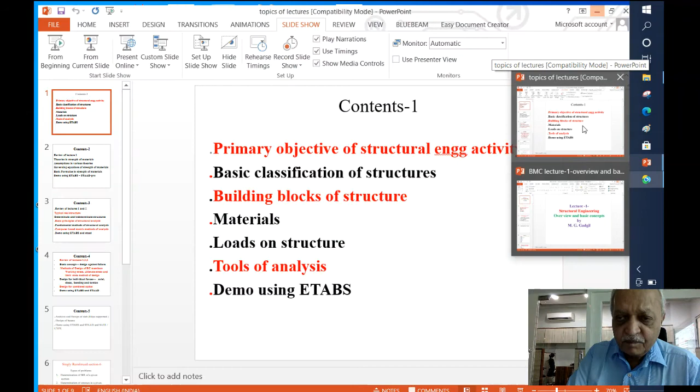And see the types of topics which we shall be considering. We have arranged this entire course in 7 or 8 sessions to start with, where we just want to see which topics we shall be covering in the entire coursework.

The first lecture that we shall be considering today is the primary objective of structural engineering activity, basic classification of structures, building blocks of structures, then the materials that we consider in our field, then the loads that we apply on the structure, the tools of analysis, and some demo if required using the software which is very popular, ETABS, and so on. I think most of you are exposed to the software ETABS or STAAD or something.

Okay, now this is the outline of our lecture today. In the next lecture we shall be reviewing what we studied in the first lecture. Then we shall be considering the theories in strength of materials, how we calculate stresses and so on, the assumptions made in various theories, because you determine forces, then the stresses, and then your design starts. So the governing equations of strength of materials will be studied, basic formulae which we use to convert forces into stresses will be studied, and in some demo using either ETABS or STAAD.

In lecture 3 we shall be considering the real structures which we shall be analyzing, which may be determinate or indeterminate. Then basic principles of structural analysis we shall be seeing. Then the fundamental methods of analysis we shall have a look at that. While computer based matrix methods we shall just see the outline, because we will not be going into the actual working of the method, that's not required. You have got very powerful tools and the softwares.

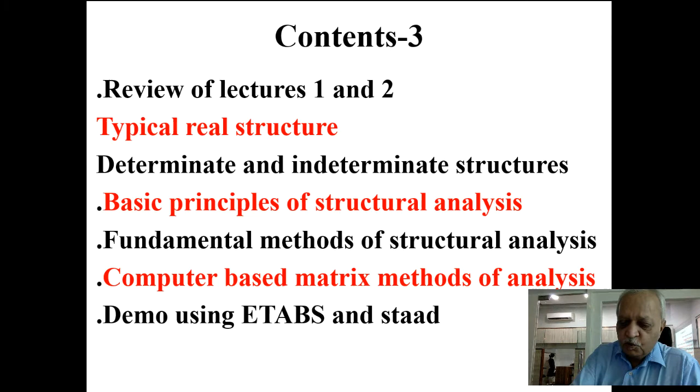In lecture 4 we shall be considering the design part. So far, the first 3 lectures were only analysis based. We shall be considering the design, where we shall consider the theories involved in the design: the working stress method, the ultimate stress, and the limit state method. Then the design for individual forces we shall see, that a member carrying axial force or shear or bending, how they are designed. And then when you have got an actual member with combined forces, we shall be considering those elements design.

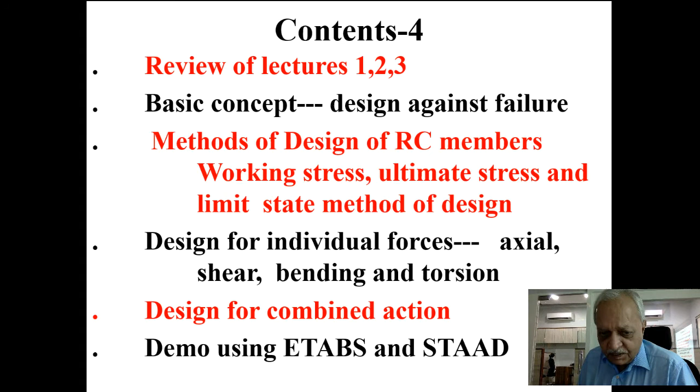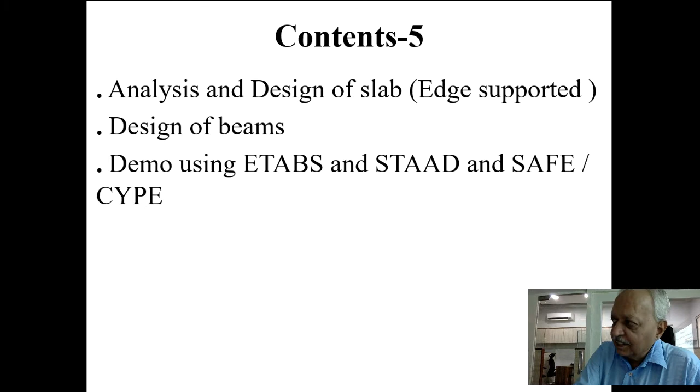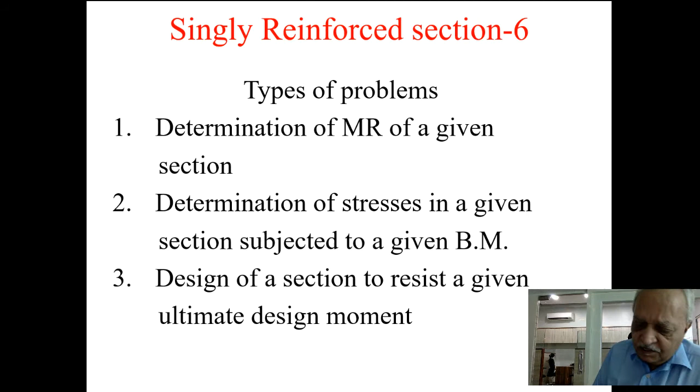Later on in lecture 5 we shall be considering the actual structural element as such, like design of beams or design of slabs, how we do it. Otherwise it is only element design so far, either design a beam or design a slab with given data and so on. Then we shall consider the important aspects of the design process, how to determine the moment of resistance of a given section, determining the stresses in the beams, and design the section to resist the given moment. So we shall see some important aspects of this design process.

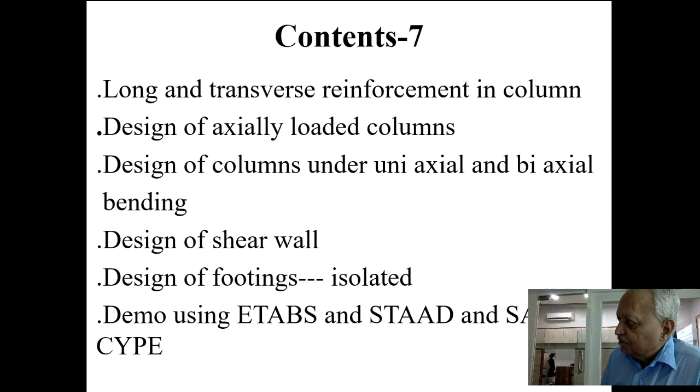Then we shall consider the design of columns as such, the axially loaded columns under axial load and moment, biaxial load, and so on. Then we shall consider the design of shear walls in isolation, then design of footings, isolated footings, and so on. Later on we will consider more complex types of structures like the raft foundation, how to design that, or the pile foundation, design of pile caps, and so on.

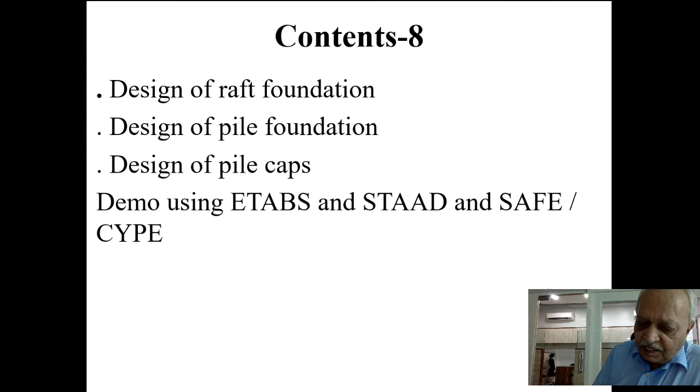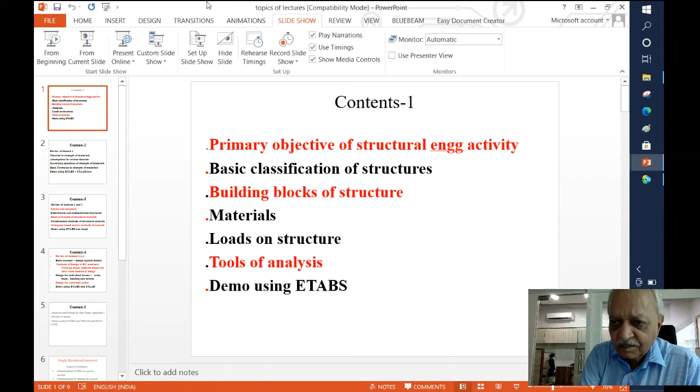Now we shall consider today's presentation, that is structural engineering: an overview and basic concepts. In this particular lecture, the topics which I have planned to cover are as follows. The primary objective of structural engineering, with which we start with this subject, then the basic classifications of structures.

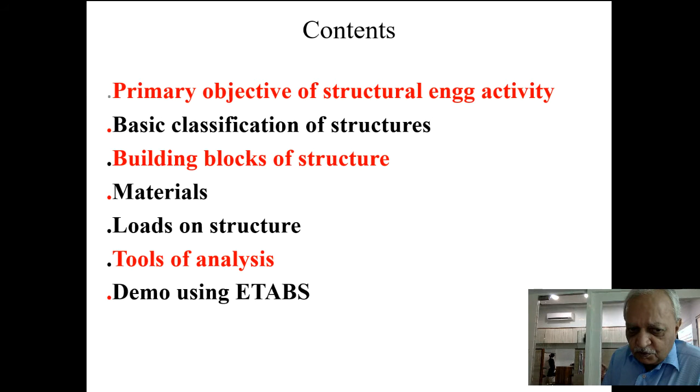Then we have the building blocks of the structure, which finally make a full-fledged structure: different materials which we use, their properties, the important properties used in analysis and design. Then the loads on the structure, different types which we have to consider. Then we shall consider the tools of analysis, and with that we will close the lecture for today.

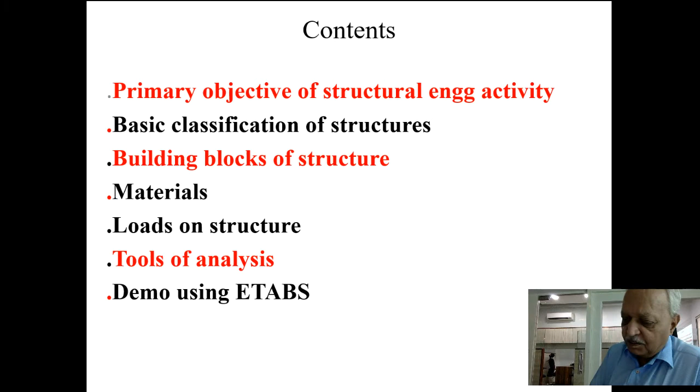Our idea is to get an overview of the field in which we shall be considering the entire presentation. The primary objective in structural engineering is to plan, design and detail a structural system which will carry safely the loads coming on it. So someone says, okay, you design this structure. The planning of the structure is a different aspect, but someone gives us a structural system - this is the building of this height, column locations and all that. Then we say we have to design this structure to carry certain loads, which are specified, and design it so that the load is carried safely. That is what we expect from the design.

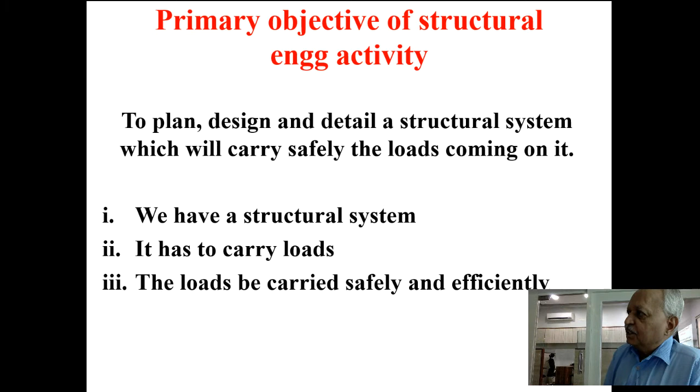So we say that we start with a structural system. Now when you say you have got a structure, we have to see, as an engineer, what you call a structure. If you ask a common man what he understands by a structure, he will look at the building and say, oh, that's a structure.

Or he will look at a bridge and say that is one more type of structure. Or maybe containers, or water tanks - he will say oh, that's also a structure. Sometimes you can see the retaining walls presented near the approaches to bridges, or in hilly areas. Then you have got dams, massive structures which have the purpose of retaining water and so on. So those are huge structures - a common man will understand, oh, that is a kind of structure.

Or an aircraft - it carries huge mass inside it. It has to safely fly, and several forces are applied on it, and there is apparently no support, as we see as a layman, since it's just moving in air. So there is no firm support as we consider for foundation of our buildings. But there are fixed points where the entire load is finally resisted in terms of the air blast that is driving it forward and lifting it up. Those fixed locations are provided in the aircraft at which the whole mass, or the gravity forces, are resisted.

Then we have got the ship, which is floating on water. So they are also massive structures. They are uniformly supported through buoyancy, and someone has to design that as a structural engineer.

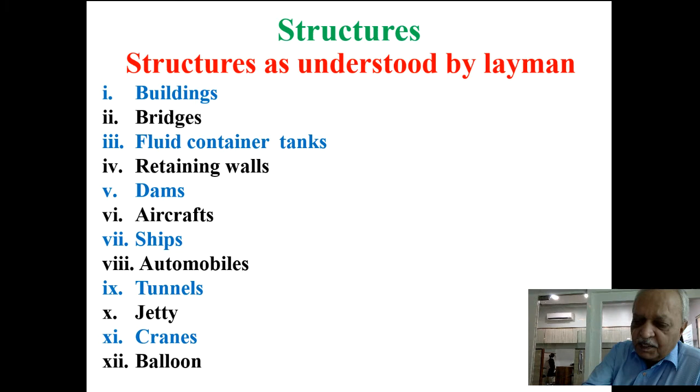So as a layman, various objects are seen as structure. That is as far as a layman is concerned. But apart from calling it a structure, a common man doesn't understand more than that - it is not expected from him. But as an engineer, you will look at the structure in a different way.

If it is a beam, you understand that it generally carries some lateral load and is supported in a certain way - so if it is a beam, you will say, yes, that's a kind of structure. You have got columns which carry a specific type of load. You have got arches - you will say arch is a kind of structure, and you will understand its behavior and know various methods of its analysis.

There are cable structures, like cable-stayed bridges - I think your company is doing a lot of work in that. There are those cables, or even suspension bridges, where cables carry a lot of load from the bridge. Then there are trusses which you see at various locations - industrial roofing, or on bridges and railway platforms. So those trusses are provided.

They may be plane trusses or space trusses. Then you have got frame type structures where you have slightly different behavior than trusses, where you have rigid joints and various types of forces are expected. While you have got floor grid systems, which is also a kind of structure where the whole structure is in one plane and you apply load perpendicular to that. Then you have slab as a continuous structure.

Then you have got shells, curved structures that you come across for roofing or various other applications. Then you have got folded plates, which also you see in many applications, roofing type structures. Then three-dimensional solids are also used, like foundation blocks or massive foundation blocks used for supporting generators or compressors. So huge foundation blocks are provided for supporting static load as well as some dynamic load.

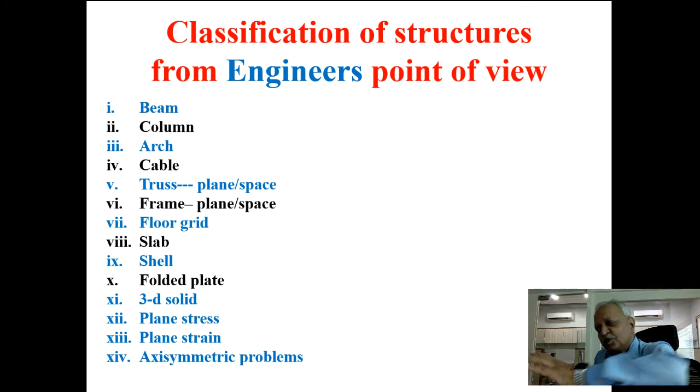The same thing is true for a tunnel. The tunnel is long, kilometers in length, but we take a slice, analyze it, and say that it is valid for the whole length. So on the same line you have got axisymmetric shells, like cylindrical shells, or cylindrical containers which are symmetric about their longitudinal axis.

So there are various types of structures. As soon as you see these types of entities, you develop in your mind some idea as an engineer, and you say that if this is the kind of structure, then you also expect what kinds of forces may be there, what kinds of displacements are expected, and so on and so forth.

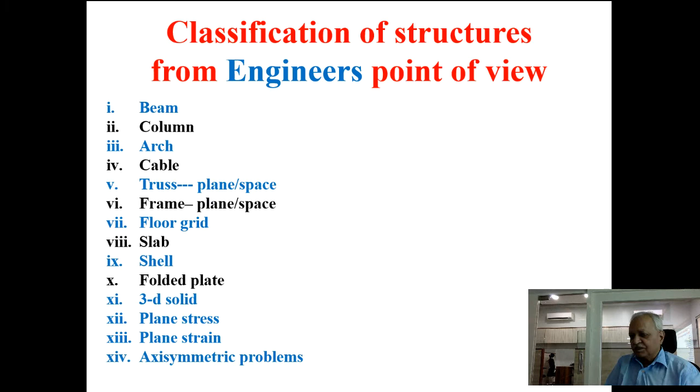So for an engineer, a structure carries a different meaning. For a common man, the broad outline is different, while for an engineer, we don't just say building is a structure, but we immediately say, is it a plane frame or a space frame, or is it a truss, and things like that. So for us, additional information is required rather than a vague description.

If someone says only bridge, then you don't understand much about that. But if you say it's a cable stayed bridge, then something is more clear to you. Or if it is a pre-stressed concrete bridge with girders, box type, then you get a certain idea about the behavior of that structure and so on.

Okay, so once you say you have got a structure, we say that a structure as an entire entity is made up of certain elements. A structure is an assembly of different members or elements suitably connected to each other and supported in such a way that the loads coming on it are safely resisted and finally transferred to the foundation.

So we have got a structure like a truss. A truss is made up of different members which are suitably connected, either by a pin joint or by rigid joints and so on. They are somehow connected and are subjected to some loads which are to be resisted by those elements, and finally it is transferred to the foundation.

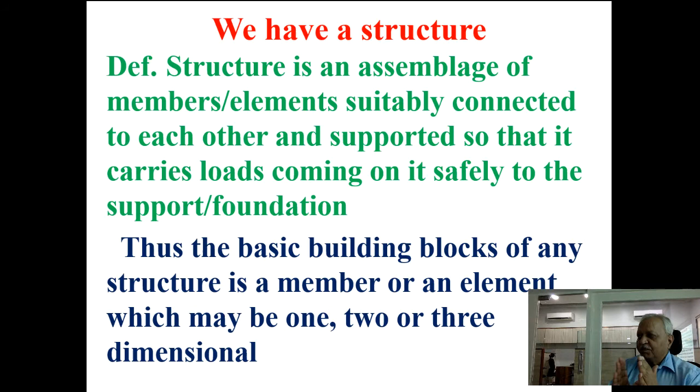So every structure has got some building blocks out of which the structure is made. For trusses, you have got various members, they are connected, joined, and then you have got the whole truss. So truss has got those building blocks, and we say every structure has got building blocks, and those building blocks have got certain characteristics.

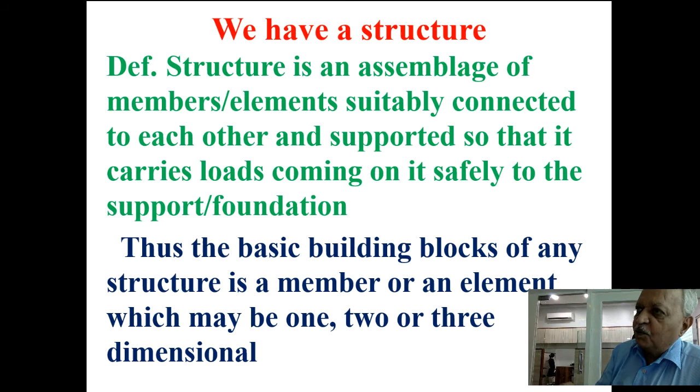So we say we have got certain building blocks like a truss. If you consider a truss, for example, these are very elementary concepts, you have studied that many times. So if you consider this truss, for example, we say that we have got this simple truss.

I think there is some problem. Okay, so we'll say that you have got this truss element. Sorry, truss, if you consider.

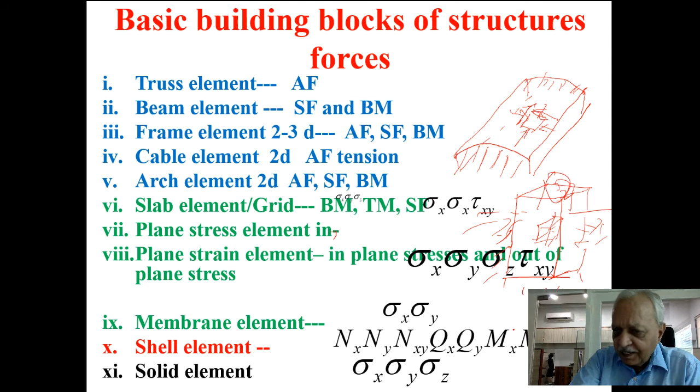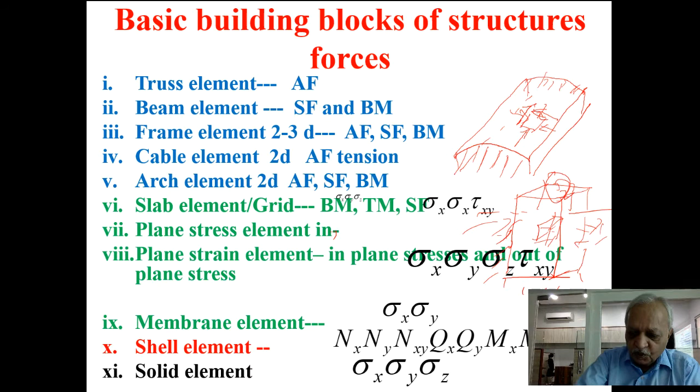So we say that for every element of a structure, as soon as an engineer, you understand what kind of structure it is, then you immediately realize what kind of forces are expected in it. And then when you do the analysis, you come across the results, and finally you realize: oh yes, these stresses are expected, primarily these will be the stresses present, and so on and so forth. That is as far as the internal forces are concerned.

In addition to that, we have got the structure deforming in some way. So for a plane truss, when we say that it is subjected to some loads, some internal forces are developed, then there are some displacements occurring in the given structure. So for a truss element, if it is a plane truss, it will get deformed, and in the deformed state, for example, you have got a plane truss.

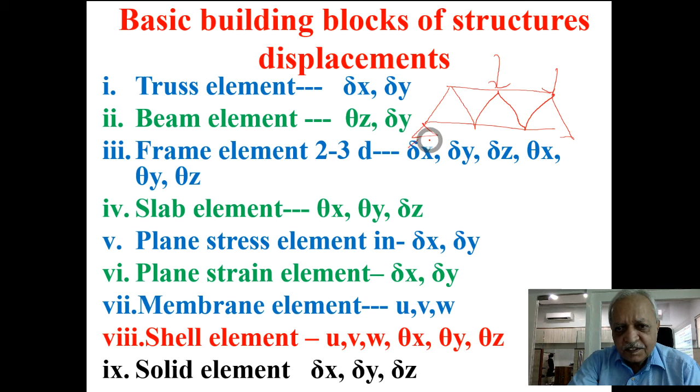Subjected to some loads, and let us say supported in some way. We say that at any point, if you consider its deformation, it will have either a horizontal deformation or a vertical deformation. So if it is a plane truss, then we will say that it will have delta x or delta y as the deformation.

If you consider the beam on the same lines, then for a beam, when you consider the behavior under the influence of some loads, we expect the beam to deform in this fashion, and at any point we say that it has undergone downward deformation and it has undergone some rotation also. While originally it was a straight line, now it has undergone some rotation. So it has undergone two types of displacements: the downward displacement, if you consider the conventional beam, and then rotation.

All these internal forces will finally give us the behavior of the structure. Similarly, for the plane frame or a space frame, we consider that it is undergoing some deformations over here. So if you have got a plane frame subjected to some loads, then we say that it is undergoing a displacement in this direction, it may undergo a displacement in this direction, and it may undergo a rotation like this.

So we say that it has got these three characteristics for deformation. Internal forces may be axial force, shear force, moment, while the deformations will be delta x, delta y, and the rotation.

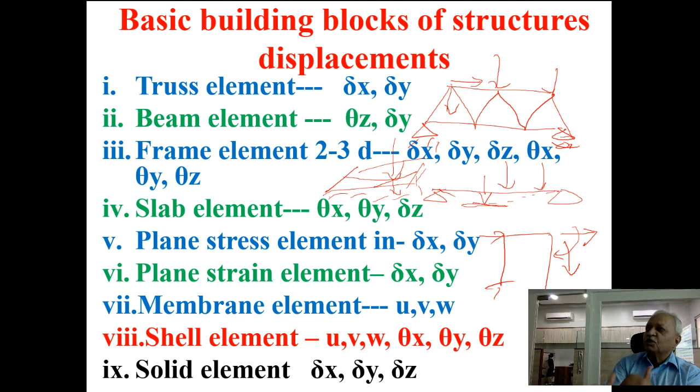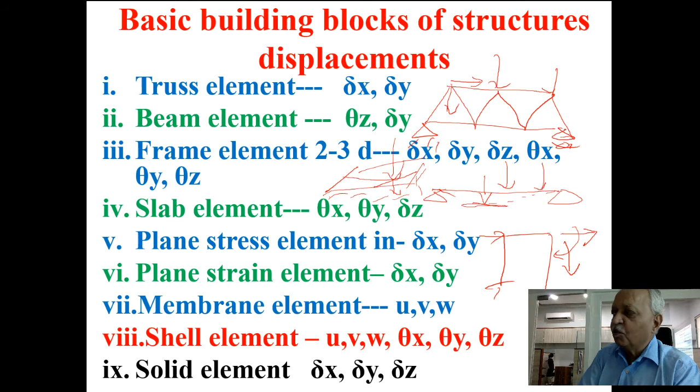When you consider the analysis of a structure, we expect certain types of deformations and internal forces. We say the structure has building blocks, and these building blocks have characteristics in terms of internal forces, while the structure as a whole undergoes deformations, which is also characteristic of the structure. This is how the engineer understands the structure.

So we have got various types of structural elements, and they develop all types of deformations and forces. With all that, you might get confused over how many things you should remember. But there's no need to do that. Having seen all of this, let us summarize.

There are only 4 types of forces. Fortunately, structures may be, for a common man, millions of types. For an engineer, 15, 20, 30 types of structures, because it is only building blocks with which you are working. But as far as internal forces, you have got only 4 types.

The axial force, which may be tension or compression. Then you have got shear force. If you take this as a beam, it may have a shear force like this, vertical, or it may have shear force like that. Different types of shear forces may be there.

Then you have got bending moment. Again, for the same member, it will bend in this plane, or it may bend like that in the horizontal plane also, so it will have 2 bending moments, and that is all. Lastly, we have got torsional moment. Torsion is different—it undergoes a twist like this, and that is the kind of moment developed.

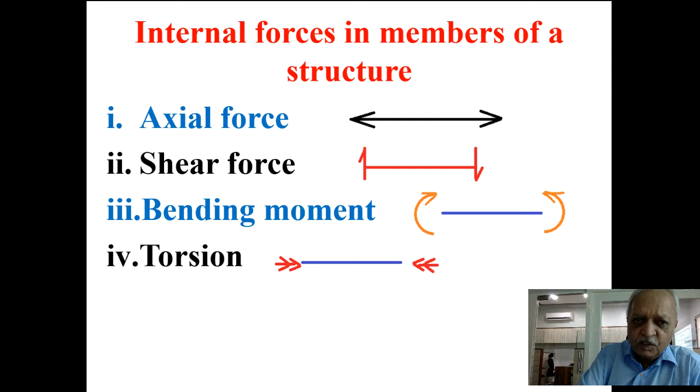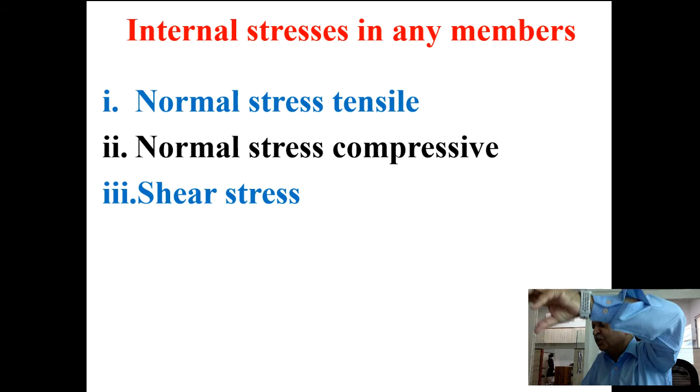So we say that finally we have to convert even the forces into stress. We started with different types of structures, different types of forces, but shortlisted to only 4, and from those 4 forces, as far as stresses are concerned, only 2—but we still say it is 3, because tensile and compressive are both axial stresses, normal stresses as we say, but their behavior is sometimes different. The material properties are different—sometimes in tension it might carry maximum stress, while in compression it might have different characteristics.

So we classify tension and compression separately, because their properties for different materials are different, but it is a normal stress nevertheless. And lastly you have got the shear stress, which also has a peculiar permissible value for any material. So having considered all types of structures and all types of forces, we convert them into two types of stresses: the in-plane or normal stresses (tension or compression), and the shear stress. The shear can be in one direction or another, but it is a shear stress nevertheless.

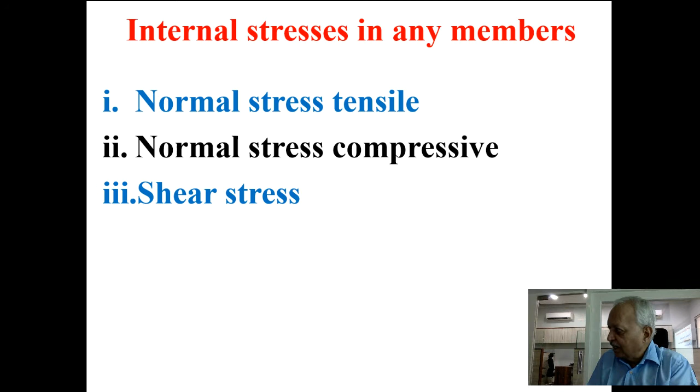So we say that for any structural element you are analyzing, finally you determine the stresses, and then your design process starts, checking whether the actual stress is within what the material can carry. So for any structure, one aspect is to determine the forces, determine the stresses, and then the next item is deciding what material you are going to use.

As a student, the problems you see now are very simple, but as a student you always thought they were very complicated because you were not exposed to real problems. The professor tells you: take this 4-meter span beam, take this cross section, take this load—everything is given. Take this support—that is also given. Take material as concrete, M30 grade—everything is given. About reinforcement, he will say use Fe415. So everything is given, and now you have to design.

But as a real engineer, no one gives you such a defined problem. People only give you a vague problem: 'I want to cover this area, give me something.' Then the problem becomes very complicated because you have so many options, and a lot of time is spent selecting the option. If you give the client 2-3 options, he will immediately ask for the cost of each, because then you have to do the design and finally compare.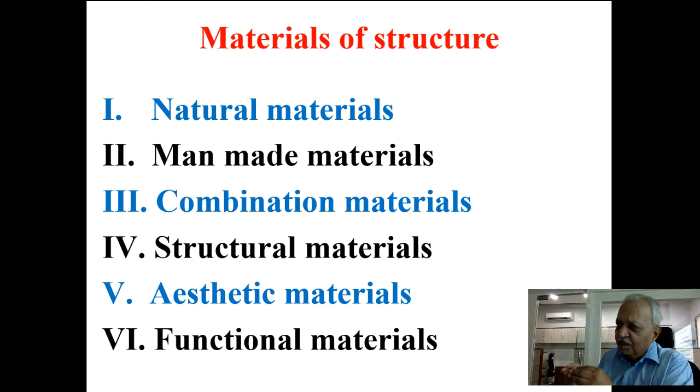Then you have structural materials, which we shall see, aesthetic materials which are only there for looks, and functional materials which have only some specific objective for which they are used in the given structure.

So your natural materials are like soil, stone, sand, timber, and natural fibers—like jute or even human hair, which are also used as structural members in structural applications. Then you have water as a structural member, because when you float an object or need water retained, you treat water as a material with certain characteristics. Then you have air—when using balloons, you have air inside as well as outside, and you have to design the structure to resist air pressure from inside or outside. Then you have human bone, which has to carry load and so has its own structural characteristics—many times when artificial joints are made or supplemented in medical applications, you consider the bone's structural properties. And you have skin, used in different applications for membranes, which can also be used as a structural member. So these are natural materials available for various applications.

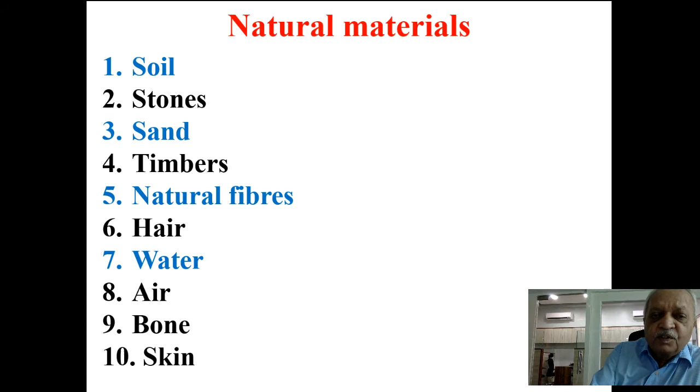Then you have man-made materials like bricks, concrete, metals—iron, aluminium, and so on. You have non-metals like carbon, sulfur, and so on, also used in many applications. Then you have compounds, chemically bonded compounds like water or salt, and so on.

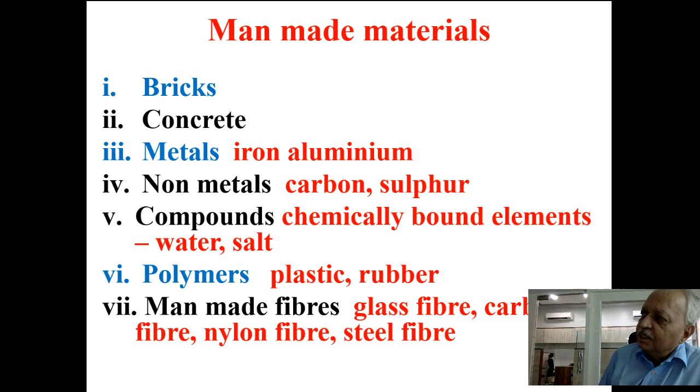You have got polymers, plastic or rubber, they are also used in many applications. And man-made fibers like glass fibers, carbon fibers, nylon fibers, they are also used in many applications. So you have got many man-made materials.

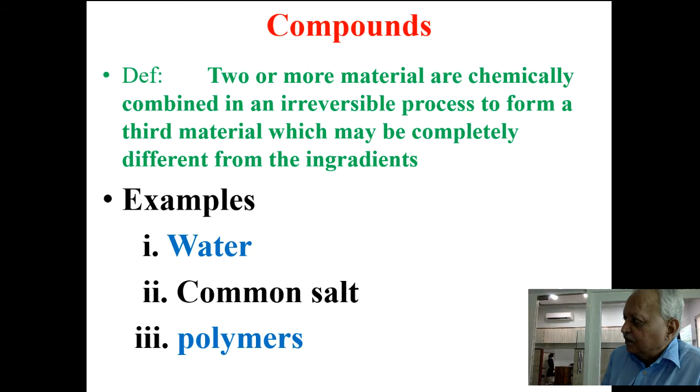Then you have got combination materials, where two or three materials are either physically or chemically combined, and you get some desired properties out of that, like compounds or alloys or composites. Many times different materials are combined together to give the required properties. Then you have got compounds like water or common salt or polymers, where the combination is made by chemical reaction, and then you get a material which is entirely different than its ingredients. So that is the kind of material which we get as a compound.

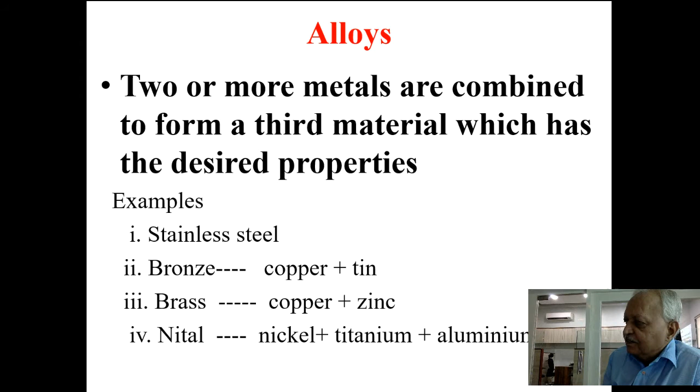Then you have got alloys. Many times we come across high strength alloys in pre-stressed concrete, where very high strength cable material is used. So you have got stainless steel or bronze or brass made up of different elements, or nickel, titanium and aluminum gives us Nital and so on. So various alloys are also available for different applications.

Then you have got composite materials which have specific characteristics. There is a binding material and there is an ingredient into it. Like our concrete, it has got a binding material as cement paste, and then you have got stone aggregate, sand and so on. That all gives you finally a composite, which is a useful material for specific applications.

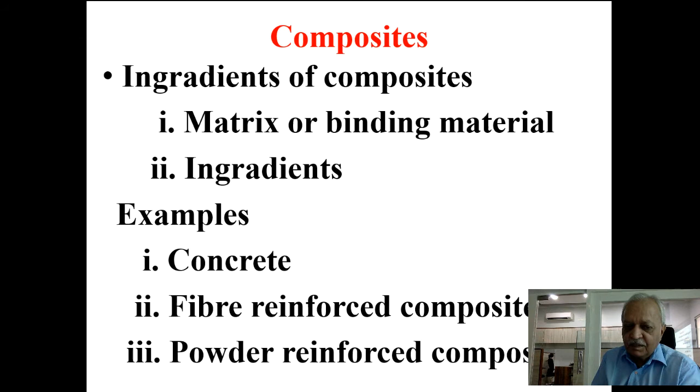You have got fiber reinforced composites. Many times we use long fibers, very strong glass or carbon fibers, which are embedded in different matrix, different binding material. Many times you get powder reinforced composites also, rather than fiber reinforced.

Then you have got structural materials which are there only for strength, like concrete, steel or fibers in fiber reinforced plastic. So they are there only for strength. There is no other application for that apart from providing the required strength.

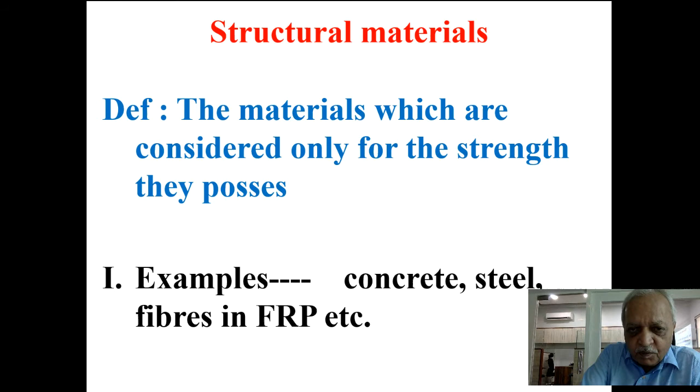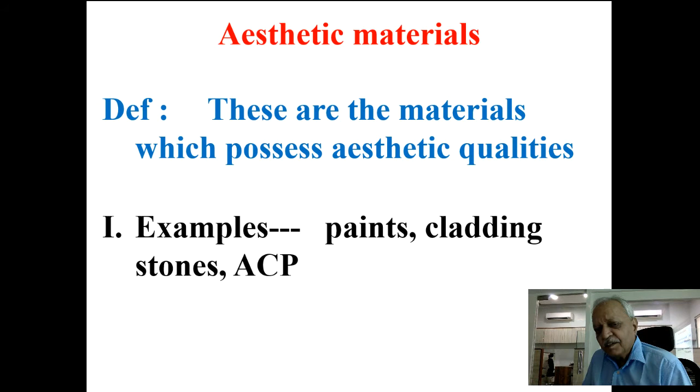Then you have got aesthetic materials which are there for looks only, for finishing purposes and so on, like your paint or cladding, stone cladding, or sometimes you use ACP cladding, those aluminum composite panels.

So there are different types of materials, and then you have got these functional materials which are there only for a specific objective. Like you must have seen the curing agents or retarding agents used in concrete, where they delay the setting process. Otherwise there is no other function. Concrete will have its normal strength later on, but if you want to delay its setting process, sometimes you have to transport concrete over a distance and don't want it to set, so you use those retarders. So there are functional materials which you have to use for specific applications, or even for corrosion resistance, where you want to use some materials to prevent corrosion, as a coating and so on.

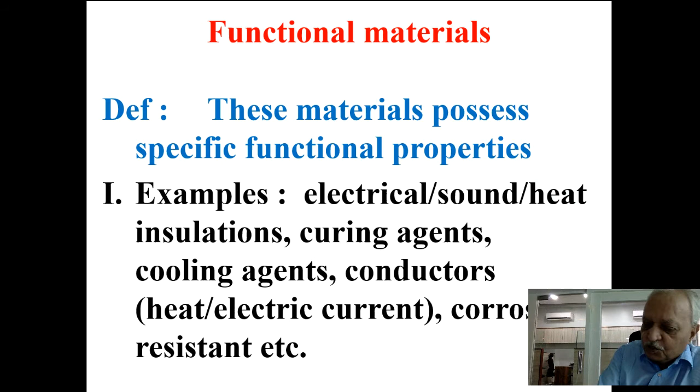Okay, so we say that we have various types of materials available for different applications, and depending upon our need we have to get used to those different characteristics and finally see which best suits our requirement.

Now, having seen all these materials as a common man, it's only the functional part we have seen, that it is used for this purpose or that purpose. But then as an engineer, when you design the structure, say you might use a specific material, but which properties will you be interested in understanding, whether that material is useful to you or not.

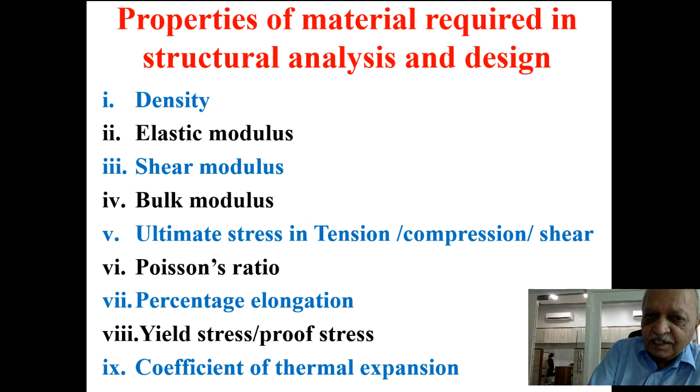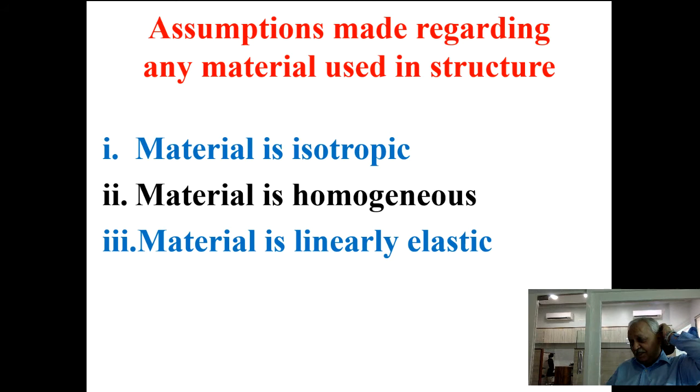So we have seen various properties of the materials, but with all those properties, my question still remains: I want to analyze the structure, so what is the use of all those properties which I have studied?

I know the ultimate stress and coefficient of thermal expansion and all that, but is it all required for my analysis? For analysis purpose, I need to make some simple assumptions.

One, the material is isotropic, which means the properties are same in all directions. I might apply load in x, y, or z direction, but my Young's modulus is same in x direction, y direction, z direction. So that is what we say is isotropy, in each direction the properties are same.

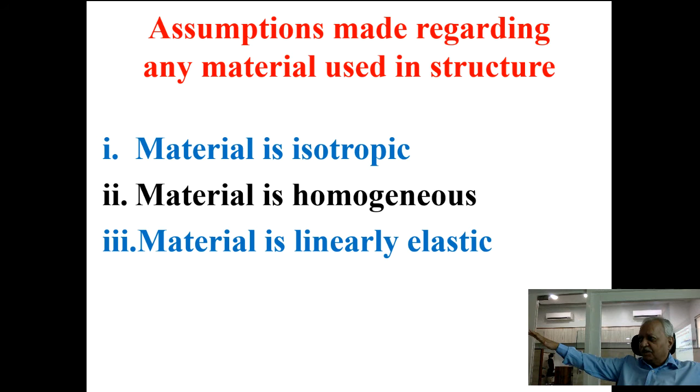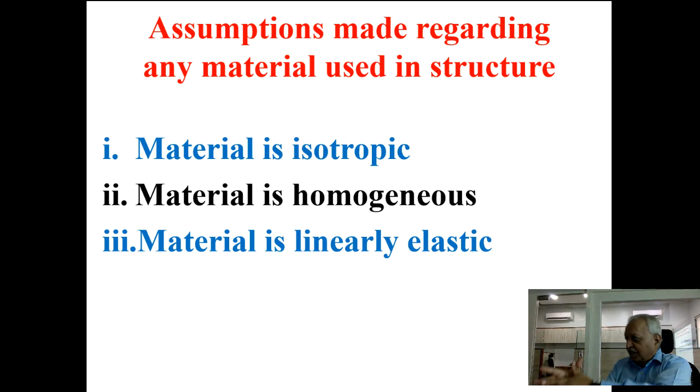So I make an assumption. A structure may be very large, a huge shell structure, but I will say that at any point the properties in all directions are same, that is isotropic. Secondly, I say it is homogeneous, which means everywhere, whether beam support or mid span, the property is same. I don't want it to have different properties at different places, because that is very dangerous - I would have to each time see what is the property at that place. So I cannot have a theory that can handle such a situation, so I make an assumption that everywhere it is the same property.

So we say it is isotropic and homogeneous. Homogeneity means everywhere it is same. Isotropic means at any point it is same in all directions.

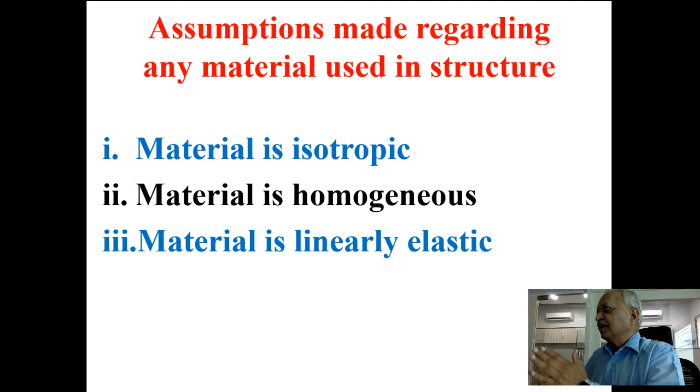And thirdly, we always consider the material as linearly elastic. It has the same property, but it is elastic also, which means if I increase the load by 20%, my deformation will increase 20%, if 50%, likewise. So it is linearly elastic - my load deformation relationship or stress strain relationship is linear. That is a guarantee to me that if someone says I am applying this additional load...

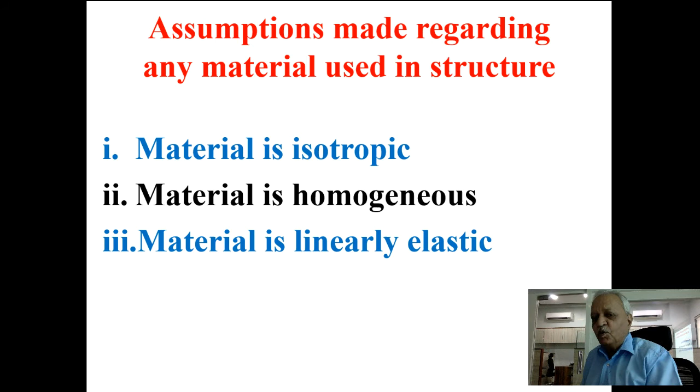We immediately see whether it is within elastic limit, that is fine, then I can immediately calculate its deflection. Many times we do the same in our analysis - you increase the load, doesn't matter, our E value is same, so our analysis immediately gives you proportionate increase in deformations and so on. So our assumptions made in structural analysis are: isotropic material with properties same in all directions, homogeneous meaning everywhere it is the same, and lastly it is linear elastic.

With that we start analyzing the structure, and then one important data is required, and that is the loads on the structure. The loads on the structure are of different types, and we have to deal with all those loads.

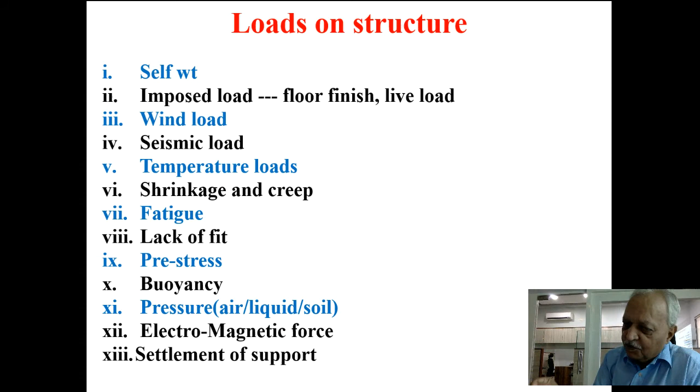Some tolerance you have to have. Tolerance may be in millimeters, or a fraction of a millimeter, or sometimes larger. It all depends upon your fabrication accuracy. So once you have a member which is either too long or too short, you have to force fit it anyway, because you can't throw the member away. It has to be finally assembled. So you force fit it, or use a jack and stretch it, and then somehow put the member inside.

Then you have pre-stress, with which you are all well versed. Due to pre-stressing action, some internal forces are developed. Some buoyancy force sometimes you have to handle when considering a structure floating in water. Or you have pressure, maybe internal pressure, air pressure, liquid pressure, or soil pressure when considering a retaining wall, and in case of a basement also you have to consider soil pressure.

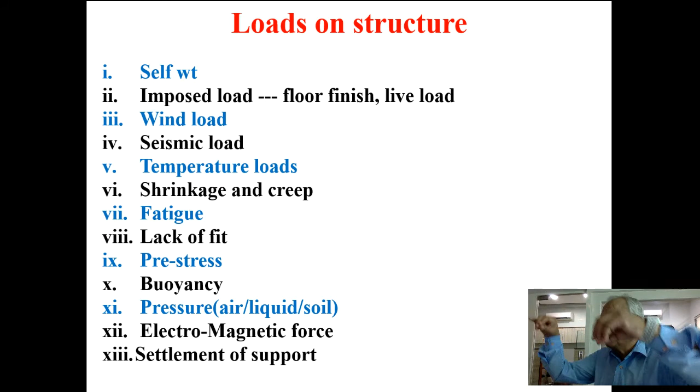Then you have settlement of support. When you have the structure, you do full analysis based on a firm support at the base. But as you apply the load, the soil is not a material with infinite stiffness, so it will undergo some small settlement. Even when you consider bearing capacity of soil, you say it is so much bearing capacity, maybe 30 ton per square meter, with a settlement of 25 millimeter. So if that full pressure is there, it will settle by 25 millimeter. That is what we presume for defining the bearing capacity of soil.

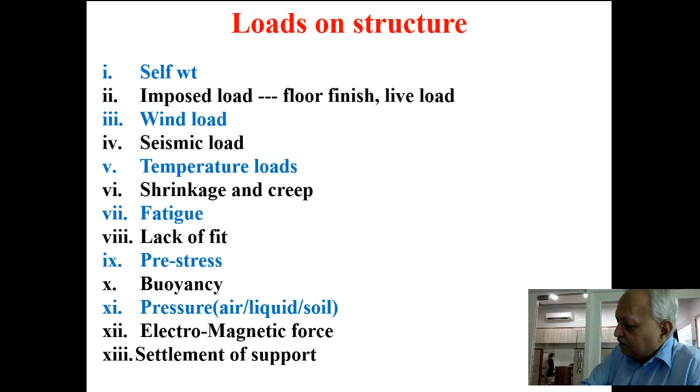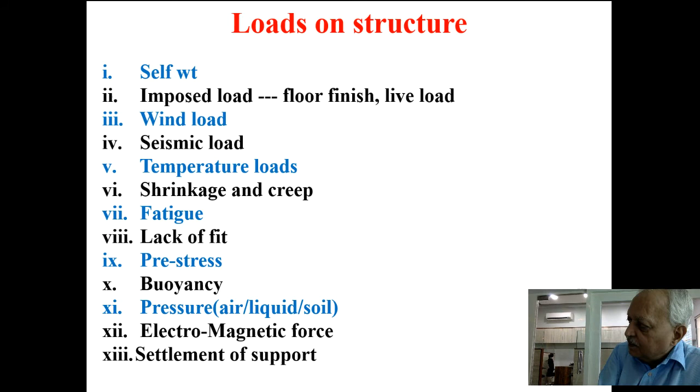Many times these are not of great consequence, but sometimes if excessive settlement occurs, it can give rise to internal forces which can lead to collapse of the structure. If some column settles due to local weakness in the soil, it can lead to very serious consequences. So we have to consider the analysis of the structure for all these types of behavior.

Now, when you consider the analysis of the structure, the final objective is to design the structure safely. To design it safely means I want to understand in what way it will fail, and then prevent that. The structure can fail due to various reasons. Finally, I want the structure to perform its function, so for the function for which it is made, it must be able to perform that function. We will elaborate on that.

Then the structure must be maintenance free. Your structure should not lead to continuous maintenance, with cracks developing every time and you going on repairing it. That should not happen. We want it to be maintenance free as far as possible, at least for the initial period, maybe 10, 15, 20 years, there should be no problem.

Until, as a designer would casually say, until my professional career, I am in my profession, it should not give problem - later on it will be that. So until my professional life, it should be okay, but not just that.

A real engineer will always see that his structure outlives him. It should be there for hundreds of years, but we will say it should be maintenance free. It must have sufficient life, and it should be economically viable. You can't design a structure which becomes excessively costly. So you want to economize, keeping safety in mind, and of course it must be a structure which can be constructed also.

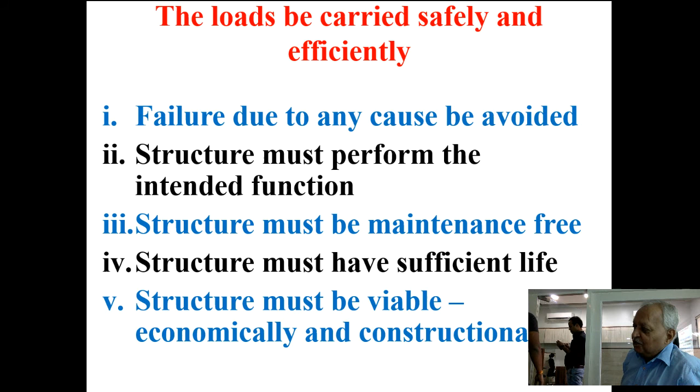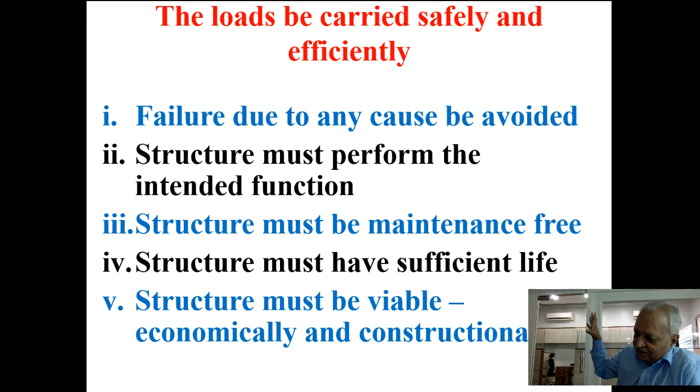So after the fabrication was complete, they tried to search for the crane available. No crane in the country was strong enough, and it needed to be a floating crane. So for 2 years they went on inquiring where it was available, and they found one crane in America called Hercules - it was a floating crane. So after 2 years, they brought the ship there, and then it was lifted and put in place.

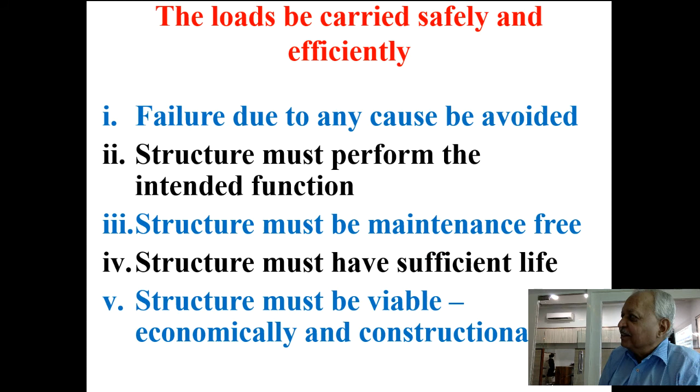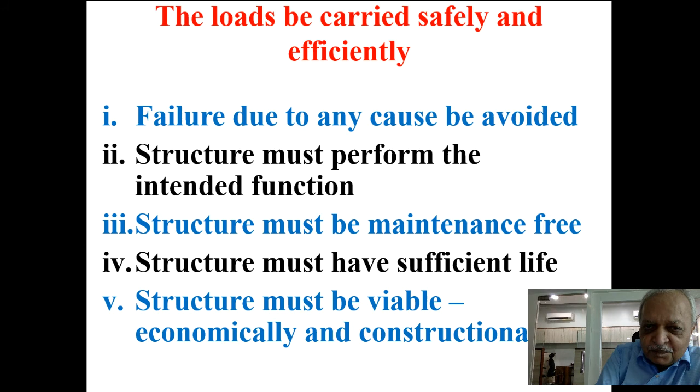Otherwise, they were just worried - they were confident they would do it, but didn't plan it. Finally, you have to see that construction is possible for whatever design you are finally doing. You can't say it is not my problem, because if the structure cannot be built, then it is everybody's problem. So if I want to design the structure properly, I have to anticipate in what way it is going to fail and then prevent that.

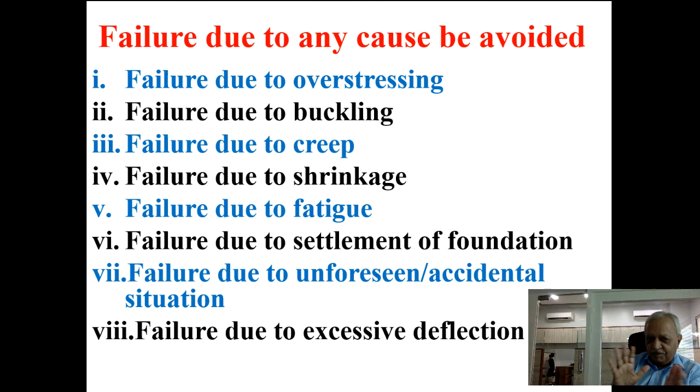So we say that firstly it can fail by overstressing - I want to select a material which is strong enough, calculate actual stress, and see that it is less than permissible, then fine. Then I want to prevent failure due to buckling - under compressive load it should not buckle. Failure due to creep - I want to limit the stress so that due to creep no excessive deformation occurs.

Failure due to shrinkage - many times you see roads develop a lot of shrinkage cracks. So that is a kind of failure, and we want to avoid that failure due to shrinkage.

Failure due to fatigue, again due to that machinery load that you are considering. Failure due to settlement of foundation - I want to limit the settlement so that excessive stresses are not developed.

Failure due to unforeseen or accidental situations. Many times you have to see that undue risk is not required to be taken, otherwise it can also lead to failure. In normal circumstances things are better, but when you take risk in your normal activity thinking 'I have done it many times, let me take the risk,' then it can also lead to failure.

And then failure due to excessive deflection. Many times the structure deforms too much, and though an engineer might say stress-wise it is fine, don't worry, the user will say 'it has already tilted, so I don't want to occupy it.' The engineer will be confident that stress-wise it is fine, but the user must also finally feel that it is a safe structure.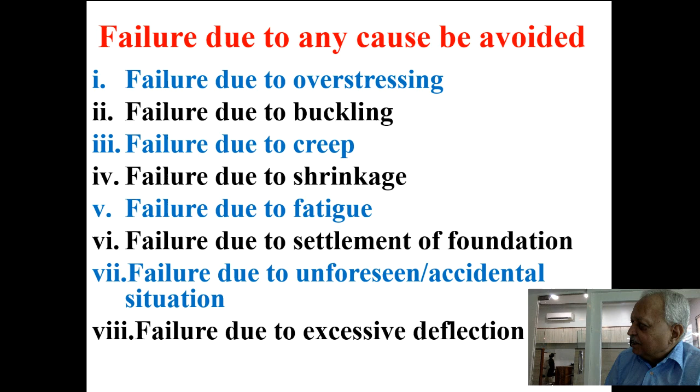So we say that the structure must perform the intended function, and the safety must be ensured when you design the structure, and so on.

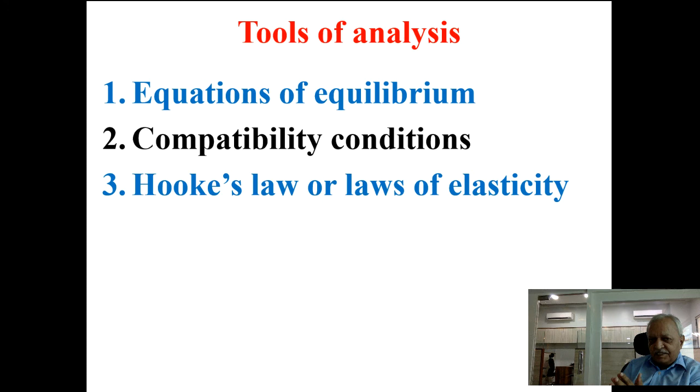Now we are almost coming to the end of the presentation. For analysis of the structure we have got standard tools which are there for you right from your college days. You have seen these standard tools of analysis. One was the equation of equilibrium.

You have to see that all the applied loads and internal forces are in equilibrium. Then you have got the compatibility condition - these are our normal equilibrium equations, sigma Fx equal to 0, Fy and so on, normal for a three-dimensional structure.

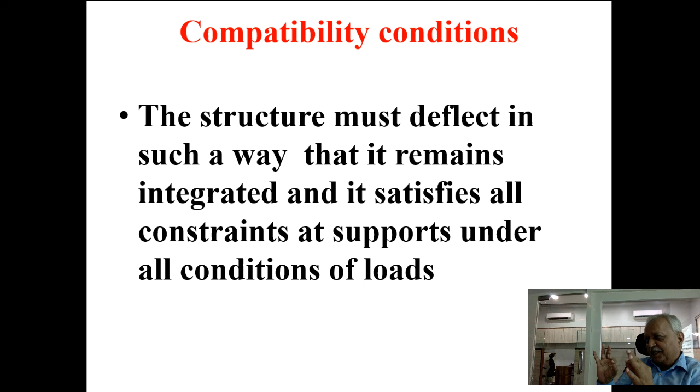The compatibility condition means the structure must deform in such a way that all members remain connected, no member gets dislodged, and it is a continuous structure all along. So that is what we say, the compatibility condition must be satisfied.

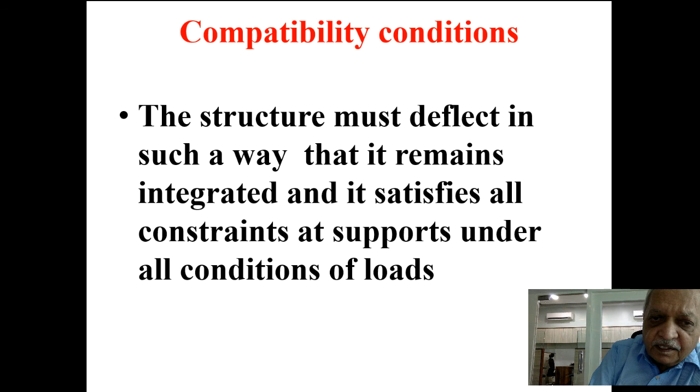And lastly we say that Hooke's law or linear elasticity must be ensured. Your stresses must be such that the elastic limit is not crossed, and on unloading the structure you should get back the original undeformed structure.

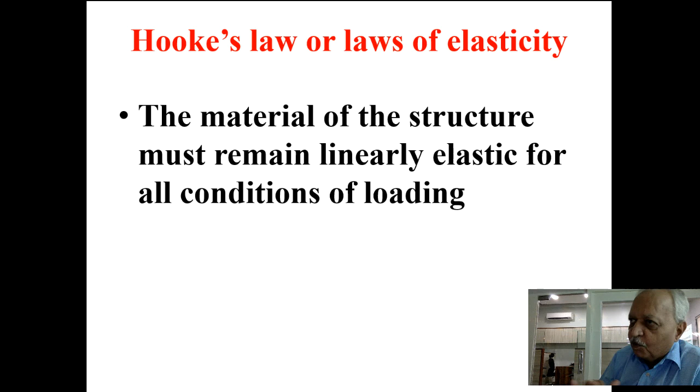So we say that the structure must be designed so that Hooke's law is applicable all along. It is a linearly elastic behavior under which we are doing the analysis.

So we shall be using the stiffness method in our analysis and see how we determine the internal forces, which I have indicated to you - only four types of internal forces - and stresses to be determined later on.

And finally we say that we have to design the structure in such a way that the actual stress is less than the permissible stress. Failures of all anticipated types are avoided.

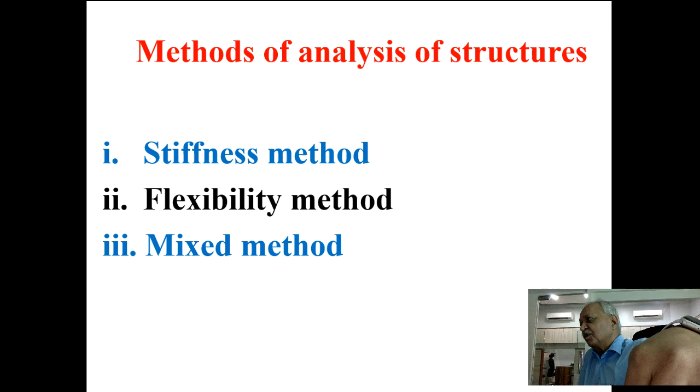I think with this we come to the conclusion of today's presentation, and we shall continue with our next step next time, when we consider the next step in the analysis - determining the stresses in the given material, since our design process would require stresses. We shall see how the internal forces, once determined in analysis, are converted into stresses, and then compared with the property of the material that you are handling.

I think with this we shall come to the conclusion. Thank you very much for your patient hearing.